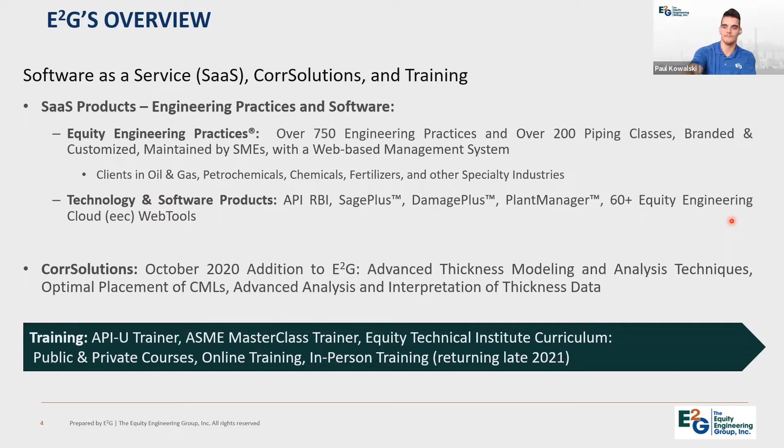Getting into the presentation, again, metal dusting in ammonia production, we'll provide a high-level overview of the metal dusting damage mechanism as far as some factors and variables that affect the mechanism, touch on common locations where you may see this phenomenon within ammonia production, as well as some common mitigation strategies and things to consider when approaching this problem. And of course, time for questions at the end.

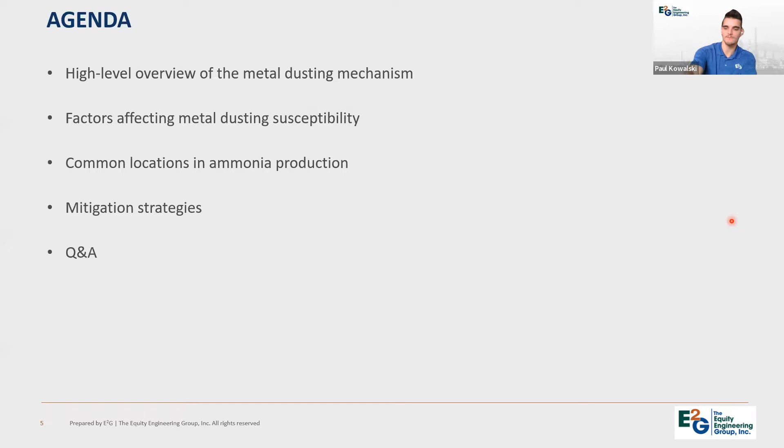So just a high-level overview of the metal dusting damage mechanism. Really, it's a high-temperature damage mechanism that can lead to catastrophic results or very severe degradation. We've seen damage rates of over 1,000 mils per year. So obviously, this is very severe. It initiates as localized pitting, as you can see here on this image, and then eventually results in just turning the metal to dust, hence the name.

So the common factors or requirements for this mechanism to occur: again, high temperature, typically 750 degrees Fahrenheit or higher, as well as a carburizing atmosphere, which is defined as having a carbon activity higher than 1. This high temperature carburizing atmosphere is commonly found in the syngas loop, which is the first step in ammonia production, as this syngas stream contains carbon monoxide, carbon dioxide, hydrogen, and steam.

And typically the higher the carbon activity, or that is the amount of carbon monoxide available, generally leads to higher damage rates. And additionally, experience suggests that damage can also be influenced by velocity or turbulence, consequently accelerating the damage rate as well.

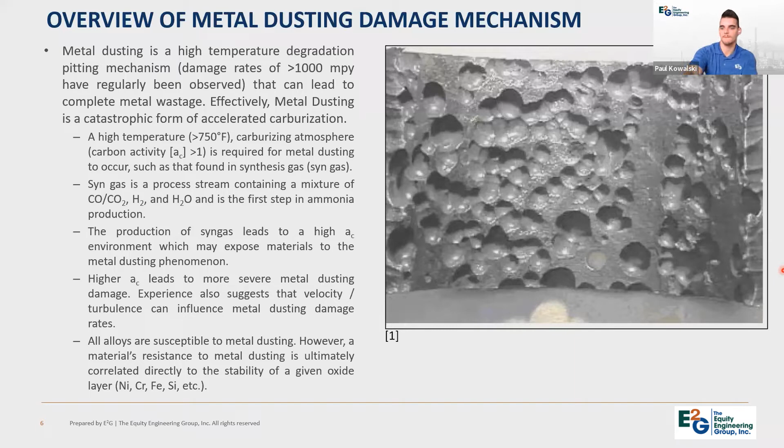So a brief schematic or summary of the actual mechanism of metal dusting. So again, first, a high temperature carburizing atmosphere is required, as we see here on the schematic on the right. In this case, it's carbon monoxide, again, which we may find in syngas. It attacks the material, or specifically attacks the oxide layer, and preferentially will go to areas of cracking or imperfection or defects in the oxide layer, and it adsorbs on the surface. So basically the carbon is sitting on the surface.

It will then form carbides, and eventually the carbon will absorb or diffuse into the metal matrix, at which point graphite is formed from the carbon diffusion into the material. And once the graphite forms and you have diffused carbon within the material, it's really an exponential process from there. And that helps explain the severe damage rates that can be observed with this mechanism. Again, higher than 1,000 mils per year has been observed.

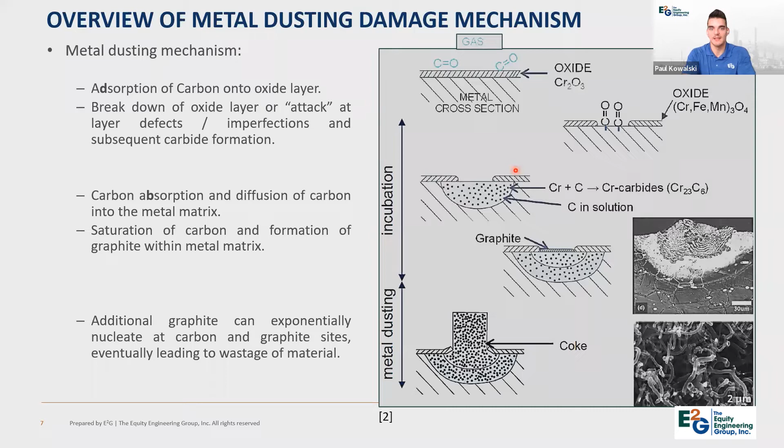And this is just an SEM image, scanning electron microscope image, of the surface of a material that has undergone metal dusting. And the white filaments and, for lack of a better word, blobs are really the carbide formation and the graphite formation from the metal dusting having occurred. So again, just another visual to help understand this mechanism.

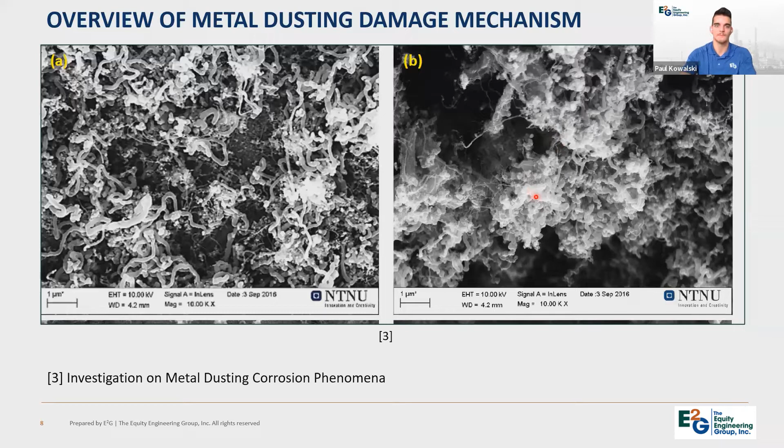So recently, in regards to operating trends, the desire for greater efficiency has led to some changes or different directions or goals on the front end of the ammonia production plant, specifically in the syngas loop. And so increased front end pressures, which is resulting in higher carbon monoxide content and therefore increasing the carbon activity, as well as lowering the steam to hydrogen ratios, which consequently reduces the oxygen partial pressure.

So the graph here on the right shows the relative stability of several common oxide layers versus oxygen partial pressure. So as you can see, as oxygen partial pressure reduces, a nickel oxide layer, for example, would be the first to go or not be stable anymore. And as you go further down, additional oxide layers would become unstable as well as that oxygen reduces. And we can also see from this graph that silicon oxide and aluminum oxide are two of the more stable oxide layers, relatively speaking.

And this graph here on the left is just, again, visualizing this trend and ultimately the results of these trends. So as we move to the left on the x-axis and increase the carbon activity on the y-axis, we're moving into the more severe or catastrophic region for metal dusting to occur.

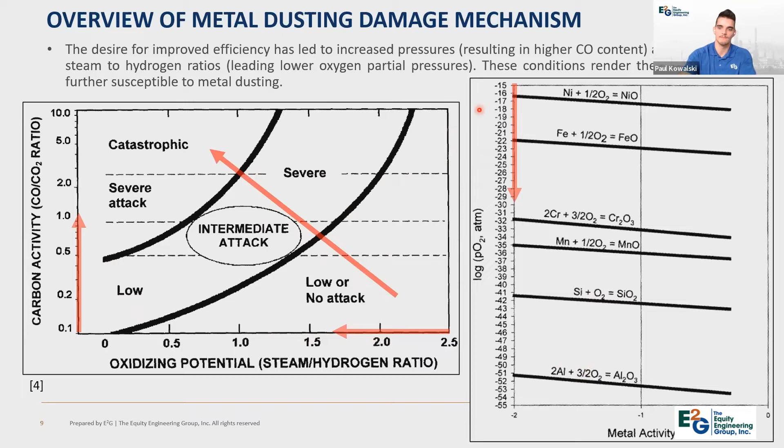So here's a general process flow diagram of the front end of an ammonia plant. Of course, we have the primary reformer and then the transfer line into the secondary reformer. Again, this is where we would expect the high temperature carburizing atmosphere, and specifically in the secondary reformer, the upper portion of the vessel, we have the process gas inlet nozzle right here, and then we're injecting air at the top. So combustion is actually occurring.

And based on experience, it appears that a combustion environment leads to a more severe metal dusting environment as opposed to, say, in the transfer line where combustion isn't occurring. So this is a very severe spot in the secondary reformer for metal dusting to occur. And typically this would be a 2 1/4 chrome base material.

And of course, with the high temperatures, it can be as high as 1800 degrees Fahrenheit. This material is also refractory lined. And then on top of the refractory, there is what's called a burner liner, which is installed to help protect the refractory from any sort of erosion or damage. And that burner liner is typically constructed of an Inconel material or a high nickel based alloy.

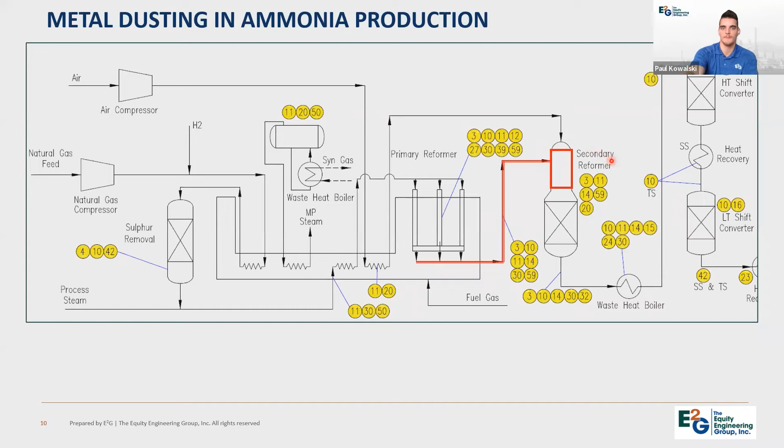So now the refractory is directly exposed to the process. It may be subject to additional damage to the refractory, and then ultimately the 2 1/4 chrome base metal is no longer protected and exposed to those high temperatures, and severe mechanical integrity issues can occur pretty quickly in this case.

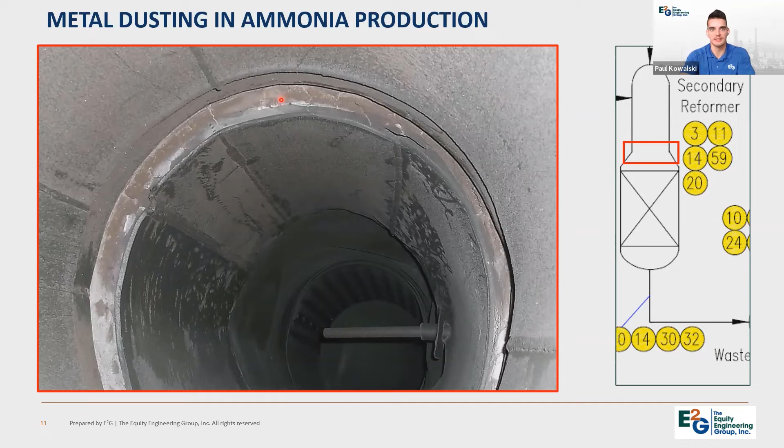And here's another picture in the same location of a secondary reformer, but this is not the same vessel. But again, this is just highlighting the damage. In this case, the burner liner was exposed to the process fluid really on both sides. So really the metal dusting rate is double what it usually would be because it's getting attacked from both sides. And we can see the complete wastage of material here.

And again, some damage to the refractory is already being identified, and this can become a large issue pretty quickly for the base material of a secondary reformer. So again, this combustion section in the secondary reformer can be a very severe location for metal dusting to occur.

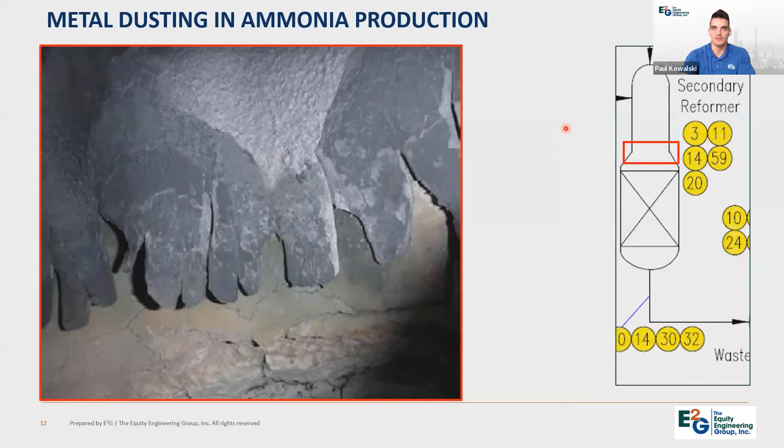So like with many damage mechanisms, operationally is when or how you would like to ideally prevent the damage. If you can change something operationally, then we don't need to worry about the damage mechanism anymore. We don't require material upgrades, etc. However, unfortunately, and especially in relation to the recent operating trends for the desire for increased efficiency, this isn't necessarily practical.

Decreasing the carbon activity, that's not going to occur because we want that higher CO ratio for better efficiency, or increasing the steam to carbon ratio. Again, that contradicts the recent operating trends and the desire for greater efficiency, so that also won't occur. So in this case, specifically for ammonia production, this strategy is likely not practical.

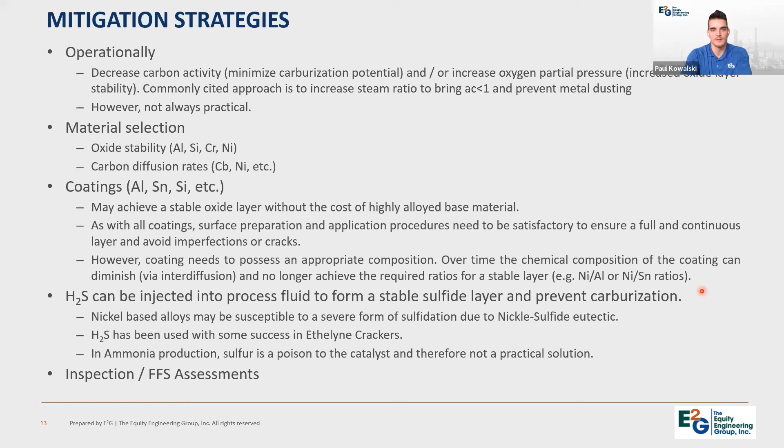And then finally, again, as with many damage mechanisms, inspection coupled with fitness for service assessments may help extend the life of the asset, and FFS may be able to qualify the asset for continued service. Of course, this is likely more reserved for lower damage rates. If in a particular case the metal dusting rate is 1,000 mils per year or higher, FFS likely won't be able to qualify that. It's just going to fail too fast. But if it's a slightly lower damage rate, FFS may be successful in qualifying the equipment for future service.

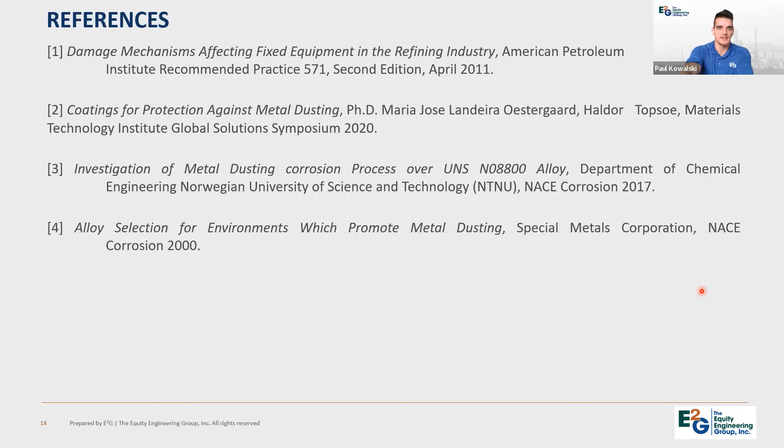And then just cited several references used throughout this report. And that is the end of the presentation. At this point, we'll open it up to questions. Thank you.